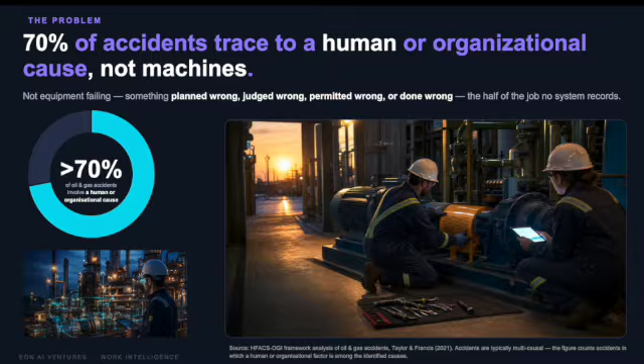Now, why is that? Here's the good news in one way: we can do something about it. 70% of accidents trace to a human or organizational cause, not the machine. And if you break that problem down, it's actually not one problem, it is 7. Now, let me talk about those 7.

The most common one is that the procedure was never practiced. The crew was doing this procedure for the first time. That happens in oil and gas, in mining, and many other areas. For that, we'll talk today about how we can address it by having a simulator called Genesis that practices the exact procedure on a twin of that plant, very similar to what we do for aircraft with aircraft simulators.

The other issue is that we lose experience constantly. The person who knew how to fix that particular issue retired in March. The way we address that is by having something that captures that knowledge before it leaves. We call it EON Tacit. They capture what they know, they check it, and they let any worker get access to that information instantly.

The third issue is when things go wrong. So you practice for the perfect situation or ideal scenario, but you haven't practiced for the bad day. That's what we can address by rehearsing things when things go wrong, in something we call EON Live. It has real physics, and if you turn the wrong knob, it will react as it reacts in reality.

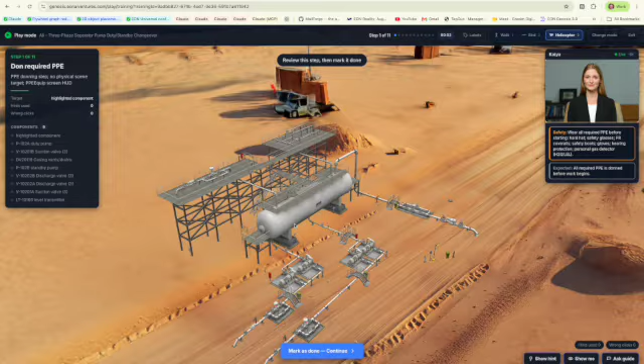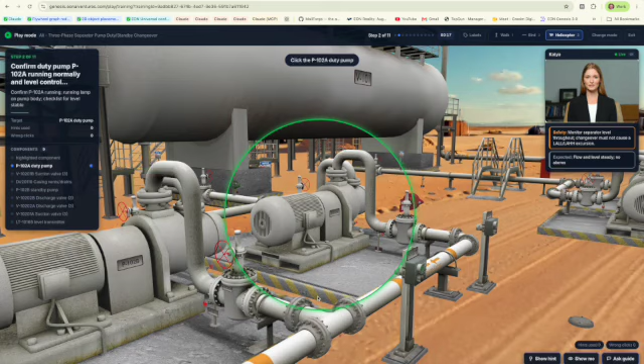Wear your hard hat, safety glasses, gloves, and other required PPE to keep yourself safe before starting any work on the system. Check that P102A is running properly and the level control is stable, since this is vital for preventing any level alarms during the changeover. Opening V1201B, the standby pump suction valve, fully is essential for a smooth changeover, ensuring the pump can operate properly when needed. Open the casing vent on DV20110 just enough to see continuous liquid, then close it to prime the standby pump.

P102B is your standby pump. First, make sure the discharge valve is closed before you start it up for safe operation. Slowly open the standby discharge valve and keep an eye on the flow and discharge pressure.

This is crucial to ensure everything is working as it should. I will not do the demo myself for the next step. This is something you can do yourself, or I'll attach a video showing how these things were created.

Okay, let's go to next. Now, to have all that, we need to have a library. We have a vast library, actually the world's largest in this field, that covers more than 8,000 components, covering oil and gas, mining, medical, and many others.

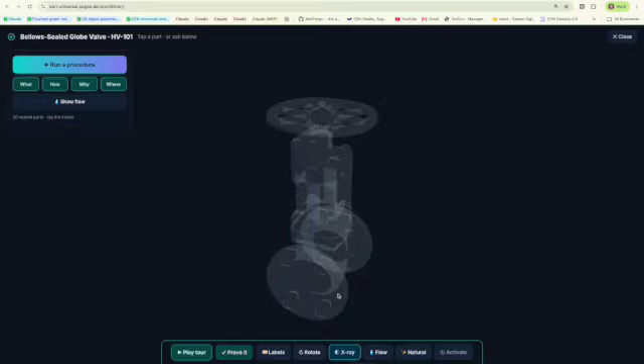I can pick any component. Let's take this one. I can see how it works. I can X-ray it, of course rotate it, label the components, get the X-ray back, turn off the labels, see the flow related to this, or play a tour to understand more about how this works.

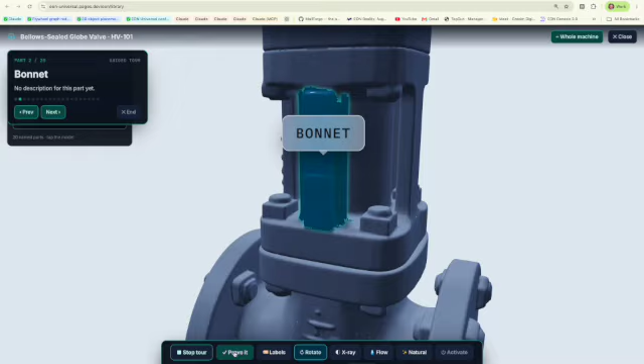I can also stop that and stop rotation, look at the parts here, close it, and run a procedure.

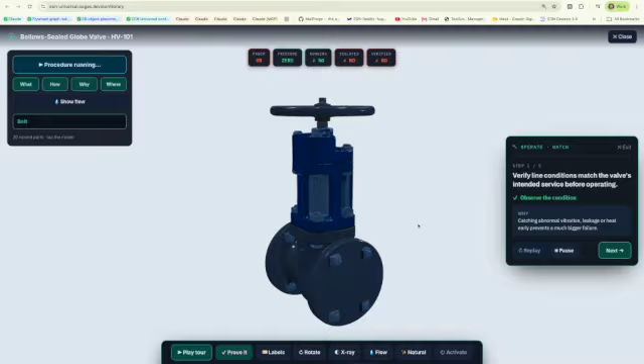For example, operation: verify line conditions match the valve's intended service before operating. Open or close the valve slowly using the hand wheel or actuator to avoid water hammer. Catching abnormal vibration, leakage, or heat early prevents a much bigger failure.

So this is the building blocks that are then utilized when you want to build something from scratch, right? You have various components, so that is a part of Universal. We also have a part where you can simply take pictures and then convert those pictures into a full plant.

The next thing is two things here. There's something called EON Tacit, and that's the lost experience - I'm not going to go into that. We have the permit, but I want to go to something called EON Live.

This is pretty exciting. The difference is that instead of having the perfect situation, you can actually simulate what happens if it goes wrong, because this has real physics engines. Let me show you what I mean.

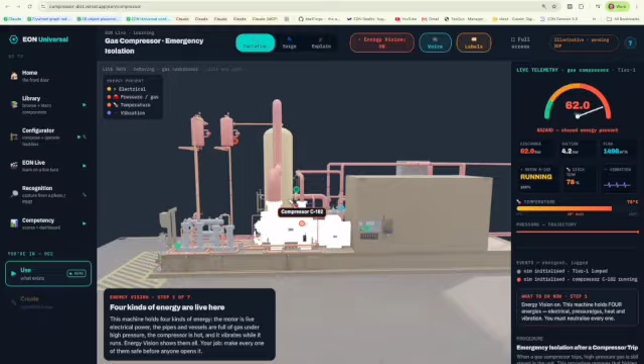Four kinds of energy are live here. This machine holds four kinds of energy. The motor is live electrical power. The pipes and vessels are full of gas under high pressure. The compressor runs hot.

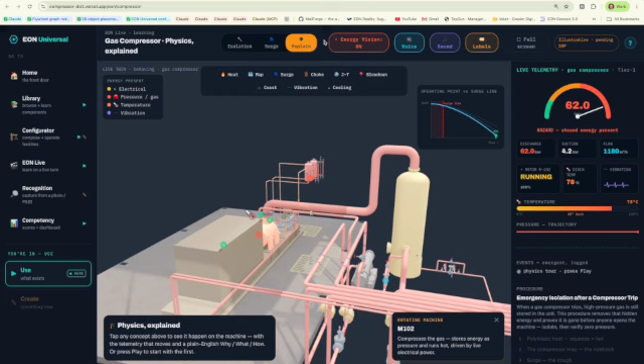I can stop that, and if I want to understand what drives this, you can see - for example, heat. Hot gas and hot metal can burn you. Squeeze a gas and it gets hot, like a bicycle pump getting warm. The compressor packs the gas tighter, so its temperature climbs to about 78 degrees.

I can see what a surge means. Surge can wreck a compressor in seconds. Starve it of flow and it coughs the gas backwards, violently. You must remove the trapped energy before opening.

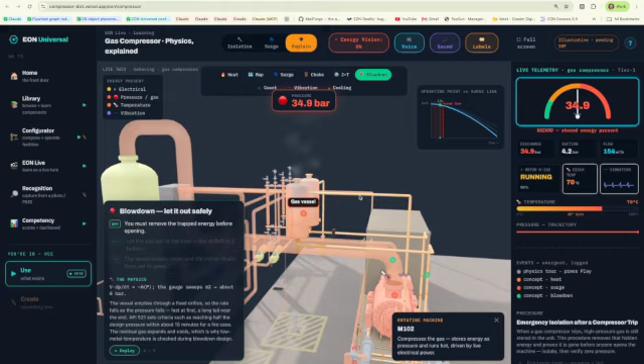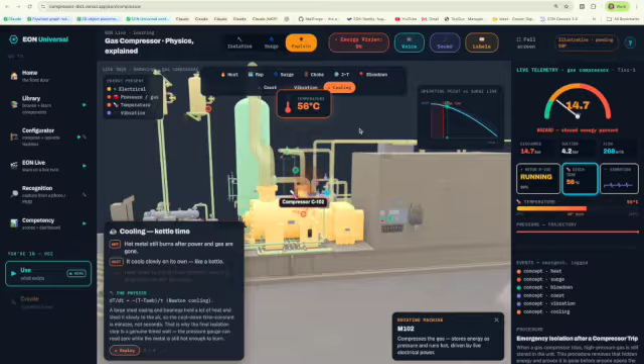Let the gas out to the flare, like deflating a balloon. The vessel bleeds - the machine is not instantly safe when you hit stop. Cut the power and it keeps spinning, like a bike wheel. The shake tells you if it is healthy or sick. Hot metal still burns after power and gas are gone. It cools slowly on its own, like a kettle.

So you can see, you can explain it, and then you can go through a process, running with surge margin to spare. A compressor lives on a curve, head against flow.

That enables you to then create numerous applications, and I'll show you just one or two. We have something called a situation room - these are real accidents that actually happened, and we drive them with EON Live, what you just saw here.

Hi, I'm Wayne, and welcome to the Situation Room. This lesson is about heat exchanger, reactor cold restart transient. Together, we'll learn to recognize the warning signs, understand what can go wrong, and act before the situation escalates. Are you ready to begin? Yes, give me the 30-second dum-dum version.